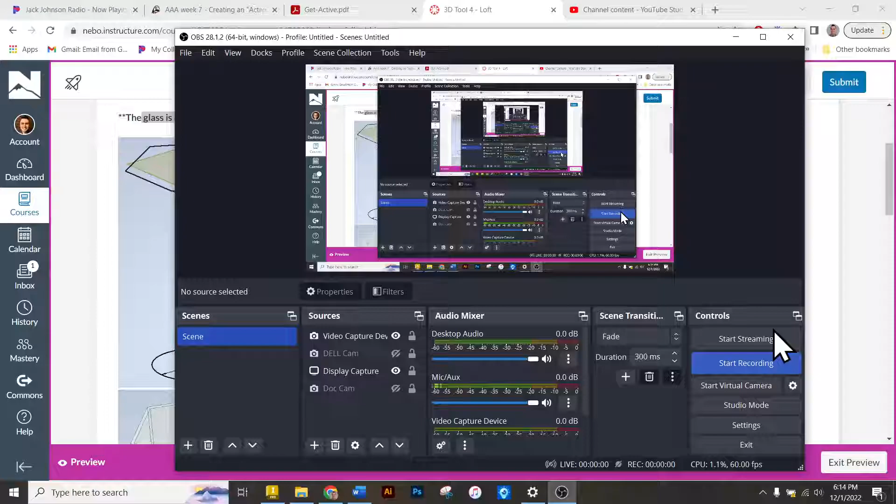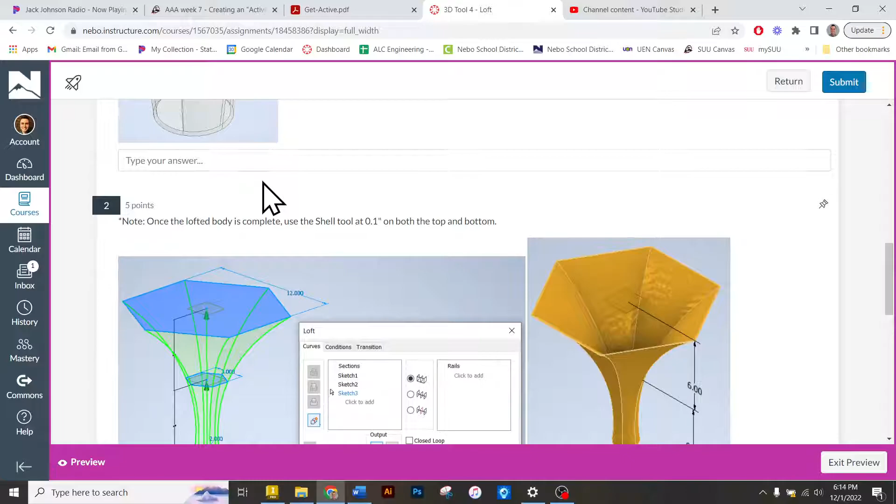Alright, so now it's time to do the Loft tool. The Loft tool is pretty awesome. What it can do is take a profile and extrude it into another profile that's different from it. So this one, to make this fancy glass, it's going to be a circle that turns into a hexagon. Some other cool ones we'll see are like the gramophone, which goes from a circle to a hexagon to a much larger hexagon, and then a fancy doorknob, that's kind of the same thing, circle to hexagon.

So let's go ahead and start with the first one, which is the fancy glass. In Inventor, I'm going to start a new file, new part, and start a sketch on the ground plane for this one so that it looks like it's standing upright like a normal glass would. I'm going to go circle, choose right in the middle there, and do 2.5, enter. Zoom out just a little bit.

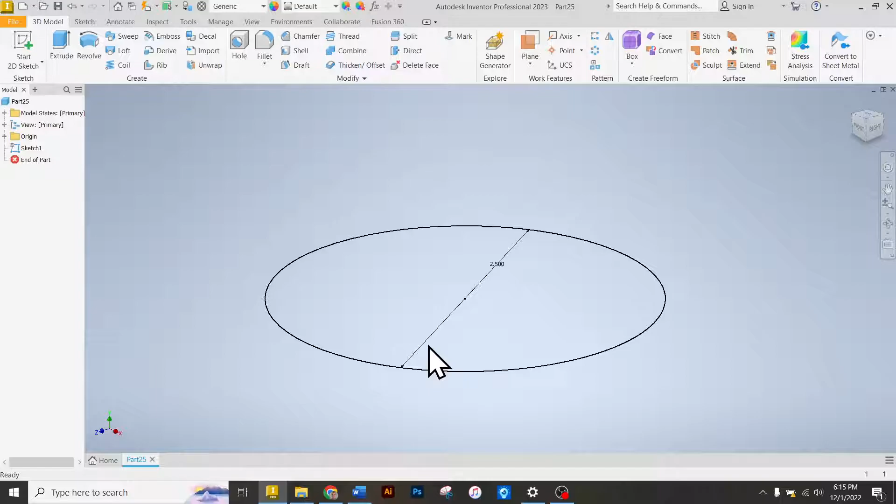Click Finish Sketch. Now I need to draw a sketch that's 6 inches above this one. Normally when we do extrusions, we just say extrude this far, but we're doing a different type of profile, so we have to create a new plane. So over here on the plane tool, we're just going to say offset from plane, that's the very first one. I'll click there, and there's nothing really for me to reference, so it won't let me click the sketch.

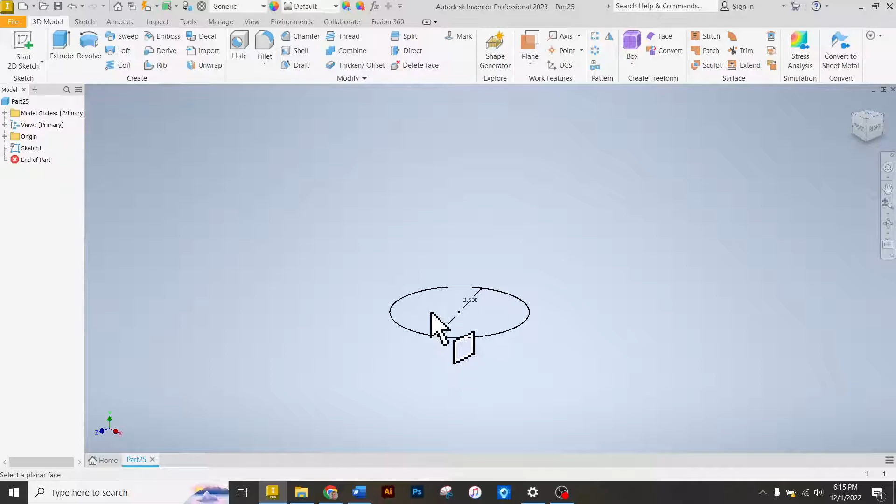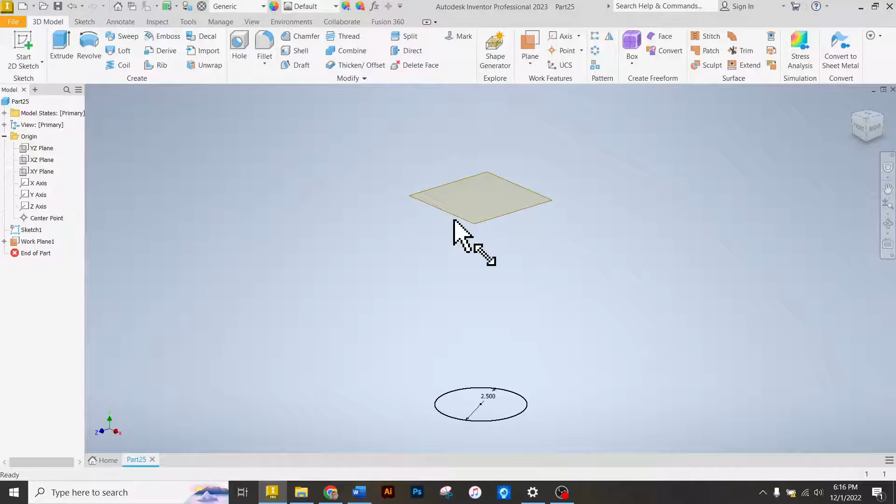So I have to go over here to where it says origin, hit the plus bar, and find my ground plane, which is the XZ. I'll click that one, and now I can raise it up 6 inches. It'll either ask me to do this manually by clicking and dragging, or I can just type in 6, enter. I zoom out, there it is. Now I can sketch on that surface. I'm going to say Start 2D Sketch, click up here, beautiful.

Now I want to make a hexagon, and the hexagon tool is a little bit hard to find. It's underneath the rectangle tool, hidden inside the polygon tool. In here I can make a polygon and define the number of edges, or sides, and this one has 6, so we're good for the hexagon.

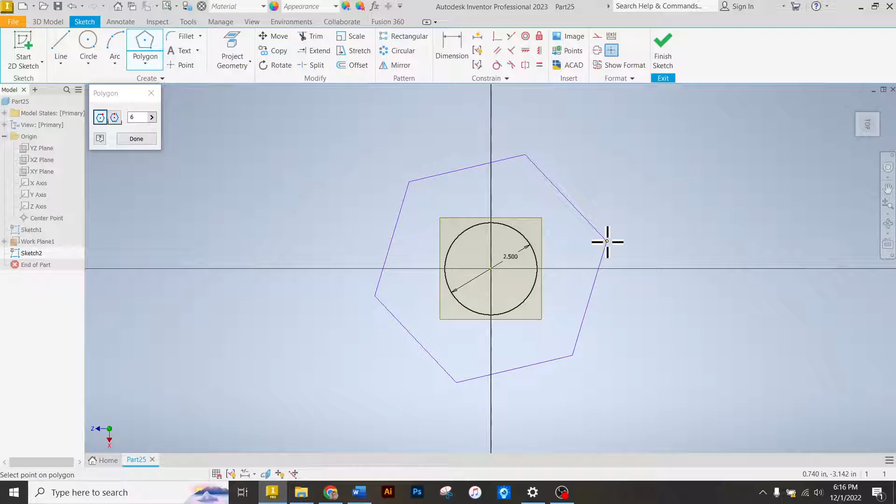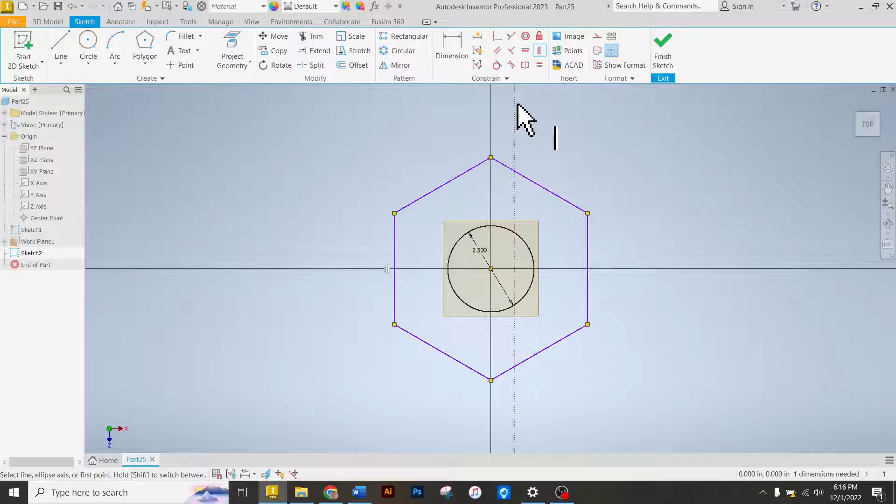So I'm going to click the center mark, and now it's just kind of floating around in space. I'm going to purposely make this a little bit off and show you how we can correct that. I'll say done, and I can use my vertical or horizontal constraint tools, either one will work, to make this line line up flat on the top. You may have to use your vertical. My orientation is backwards on this one, it's turned 90 degrees, so this is actually what up and down should look like. Anyway, as long as you've got this perpendicular, so it's either straight up or straight sideways, either way is good.

I'm going to say Dimension tool now, and go from line to line like this for the width, and it's 3.5, enter. So if I hit Finish Sketch and then look around it like this, you can see there's a profile of a circle and then a higher profile of a hexagon.

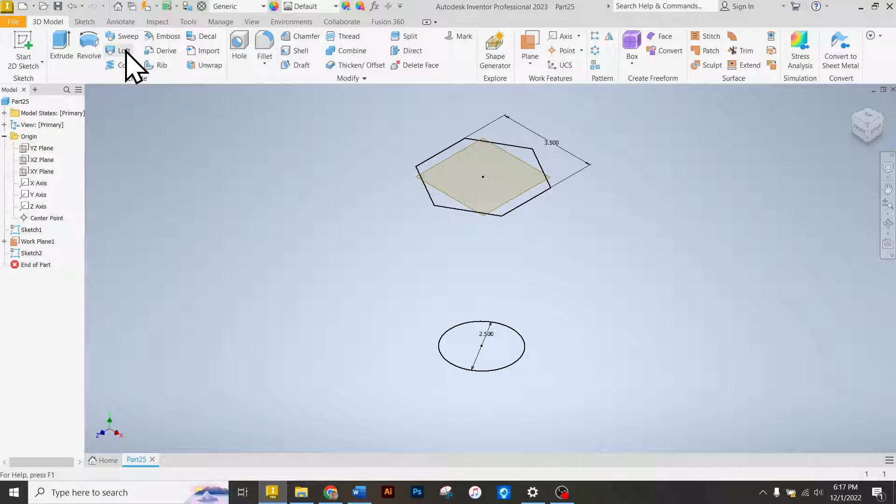So now I'm going to go over here to Loft. It's right below Sweep, so I'll say Loft, click here, and then click there, and I'm good. I click OK, and I've created a very fancy glass. Super cool. So the last part I need to do is hollow it out.

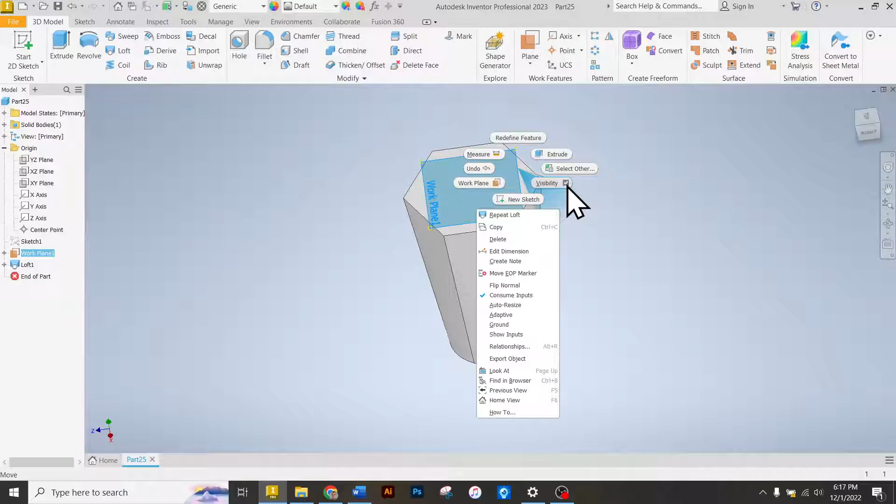So I'm going to get rid of this plane first. I'm going to right click on the edge of it and turn off the visibility, and use the shell tool to hollow it out. So shell, click the top surface, and OK. Awesome. So I made this fancy cup.

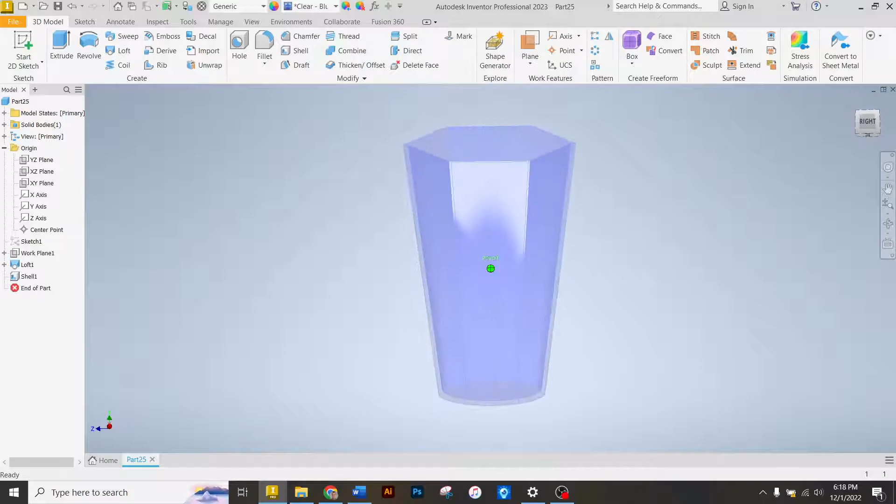I can change the appearance. Let's try glass, let's try clear blue. So it's kind of a transparent blue. Cool. I can right click on Part, Properties, Physical, and when I update, that will give me my volume, and I can enter that into the assignment down here, and I will be good to go.

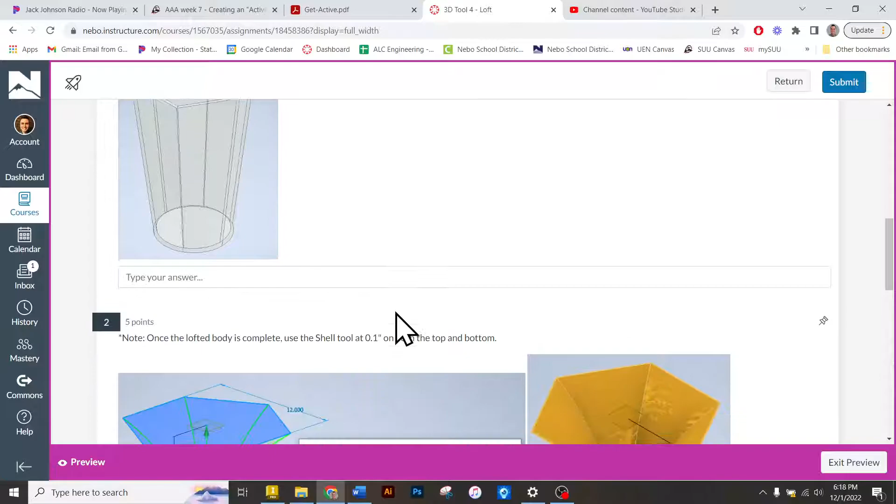Alright, so the next one I'm going to do is the gramophone. I'm going to start a new file, go back to Inventor, File, New, Part, and Start 2D Sketch. I'm going to also do this one on the ground plane first. I'll start there, and just to make this simpler, I'm going to reorient this block so that top is facing up, which is weird—don't know why Inventor does that.

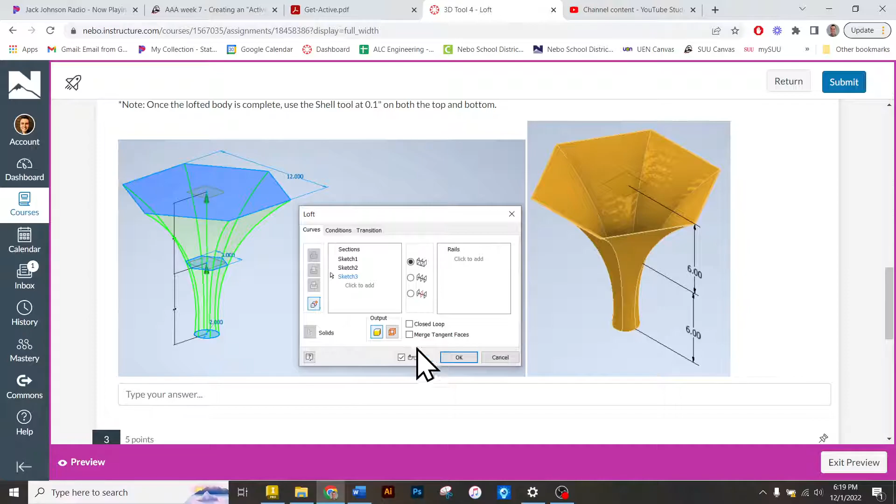And I'm going to start with a circle, and it looks like it has a 2-inch diameter. It's going to go up 6 inches to a 3-inch hexagon, and then up again to a 12-inch hexagon. So 2 inches first, right here, 2 inches, enter. Hit finish sketch. And then I'm going to do plane, offset from plane.

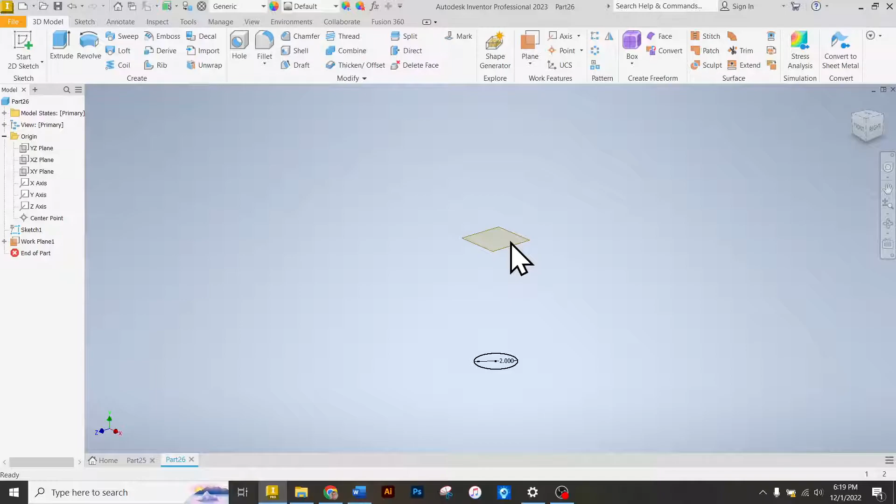And I'm going to use the origin. Click the ground plane and go up 6 inches and hit enter. And the nice thing is once I've got a plane placed in here, I can reuse that to reference another one. So I'll go make my second plane right now, or really my third one, I guess. Offset from here, another 6 inches, enter, and there we go.

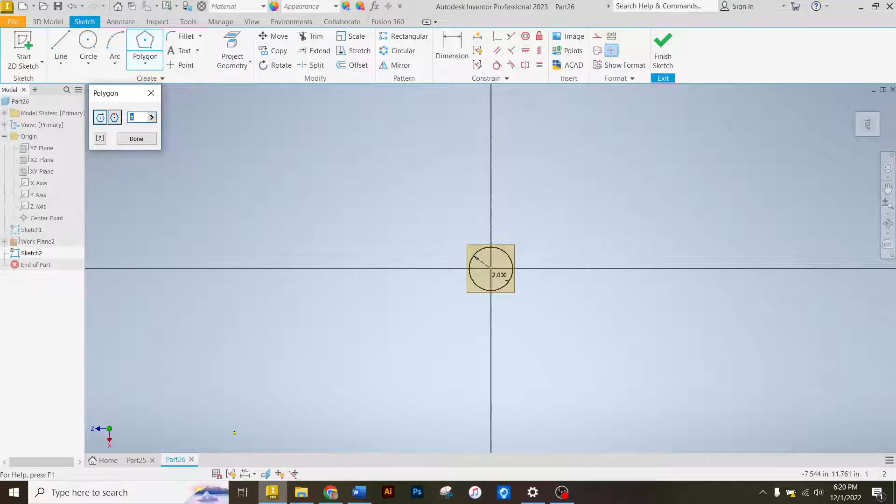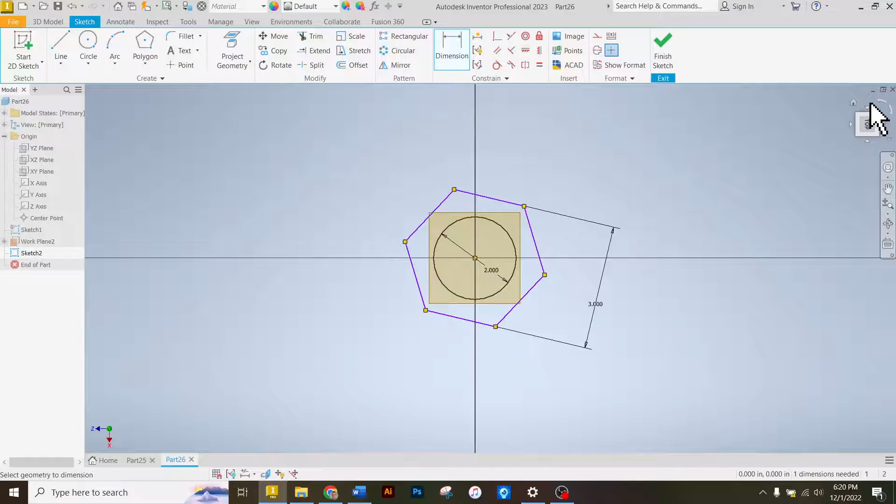Alright, so now I'm going to start a sketch on the middle one, so level 2. I'm going to put a hexagon in there. And this one has not exactly a diameter, but the width is 3, I believe. Yes, so it's 3, so I'm going to click right in the middle and just kind of drop it in here, and then redefine the edges. Make it 3. And notice it's still kind of off kilter a little bit, so I'm going to make this flat using my horizontal or vertical. And then I'll say OK.

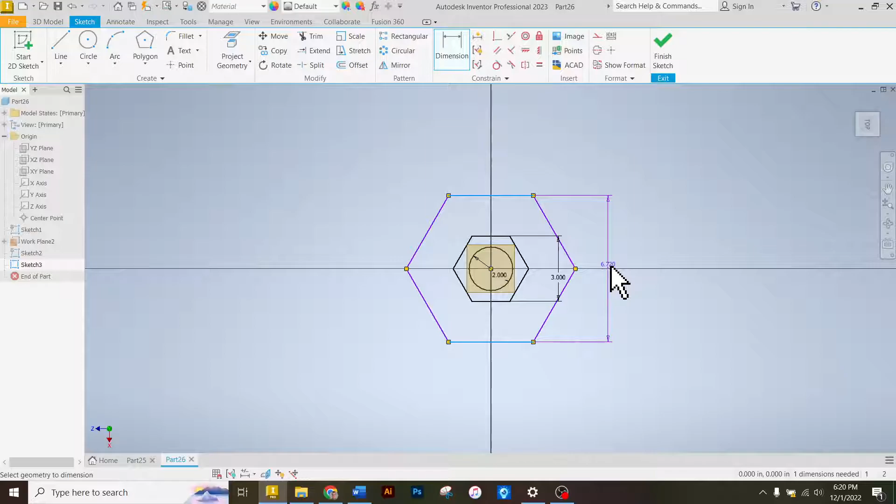Great, now I can do my top one. Start 2D sketch on the very top. And rectangle tool. Click. And I'm going to drop it in there, make this also flat, and then make it 12 inches across. Alright, sweet. So now I'm ready to use my Loft tool. Click Loft, and instead of just 2 profiles, I'm going to click all 3 for this one. So I'll start at the bottom, the next one, and then that one. And I'll click OK. I've got my basic shape figured out.

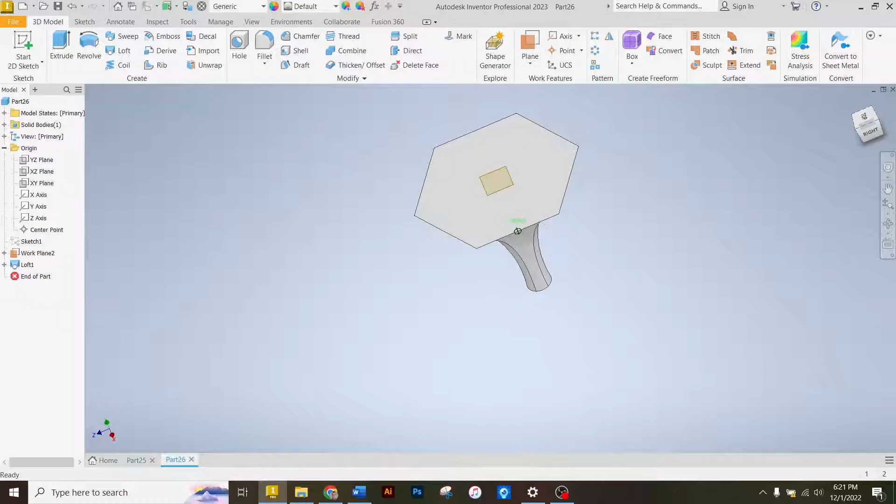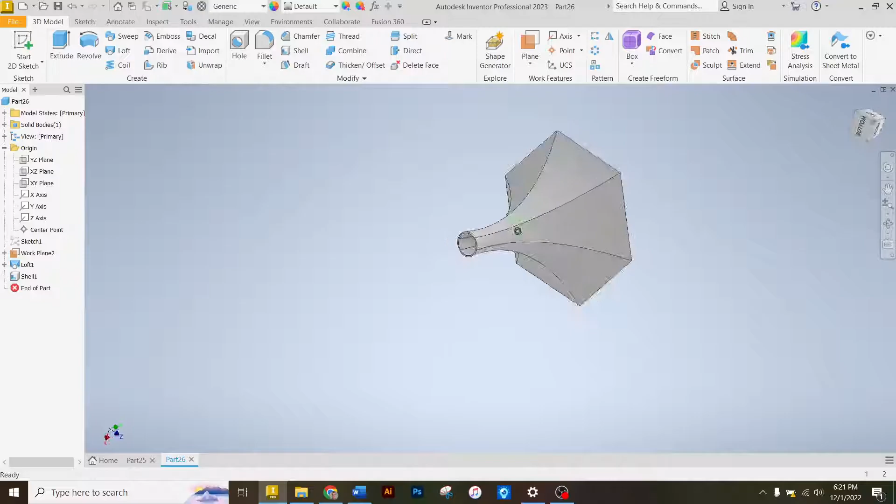Looks pretty good, right? So I need to hollow it out. I'm going to go over to Shell, click the top surface, and also the bottom one. And then I click OK. So now that makes it hollow all the way through, so I can see through to the back side. If I were to 3D print this, which would be pretty massive, I could hold that up and speak through it like a megaphone. It'd be pretty cool.

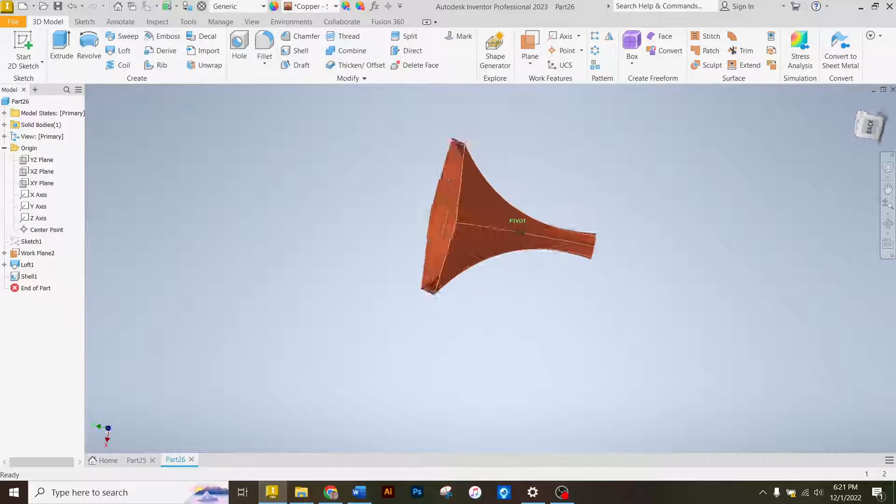Change this to, let's try copper polished, or copper satin. Yeah, those are both pretty good. Anyway, so you get the volume, turn it in, and you're done.

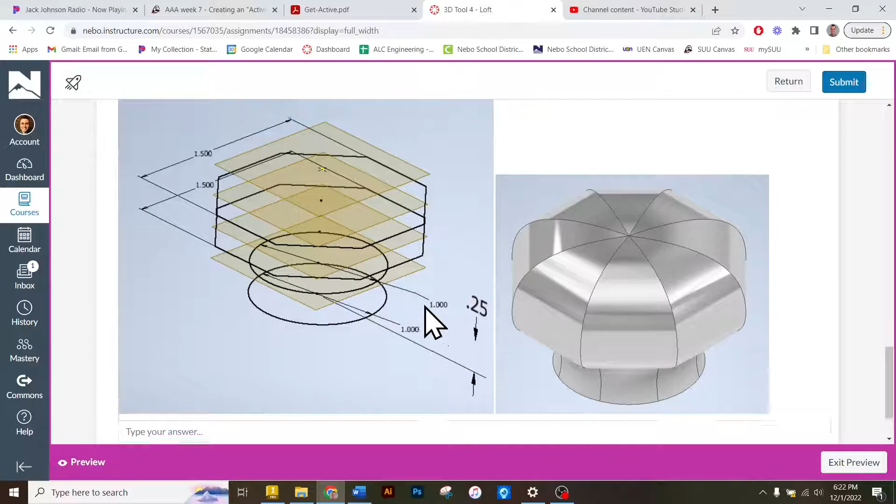Okay, so the last one is the fancy doorknob. So the fancy doorknob is a little confusing. It has 1, 2, 3, 4 planes, and well, I guess 5 if you include the original one. And it goes up, so it goes from a circle up to another circle by 1/4 of an inch, and all of these planes are 1/4 of an inch from each other. So I'm going to set this up, I'm going to draw my circle, and then set up all of these planes. So here we go.

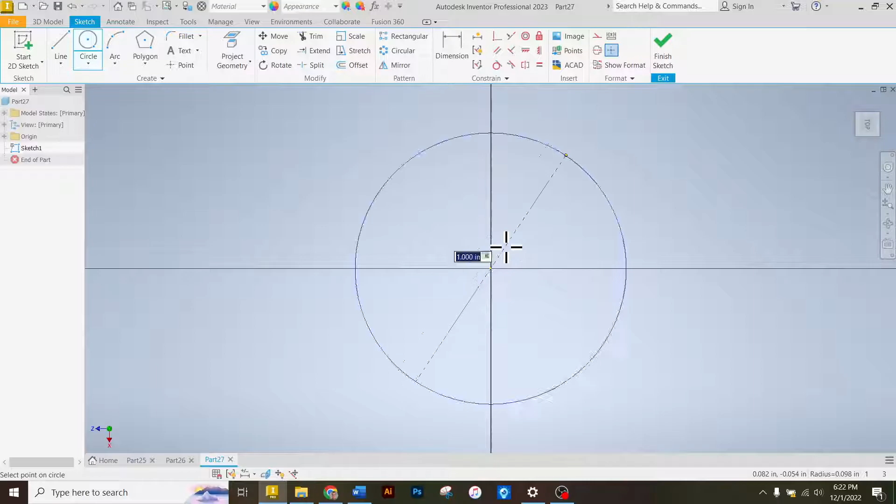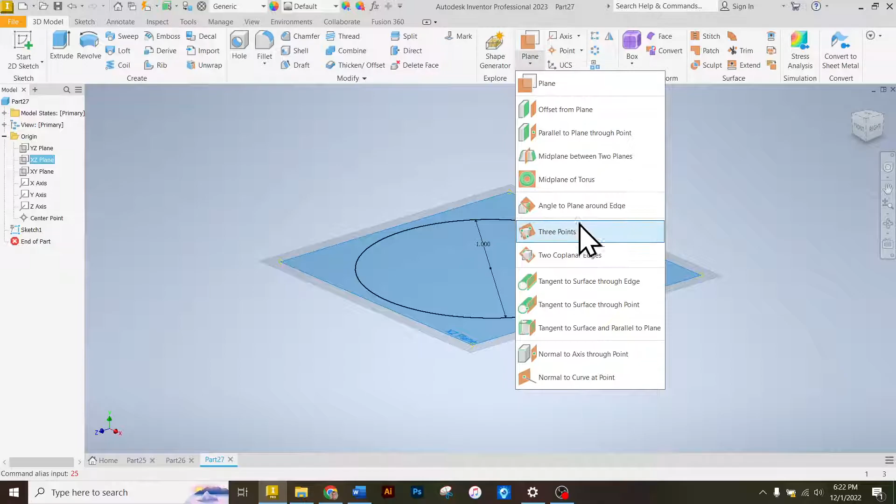File, new, start part, start sketch, ground plane, and go circle, and it's 1 inch, I believe. Yep. And finish. And I'm going to go plane, offset from plane, origin, XZ, and it comes up 0.25. It's going to let me type. Weird. Let me try that again. Offset from plane, XZ. There we go. 0.25. Enter. And I'm going to do that 3 times.

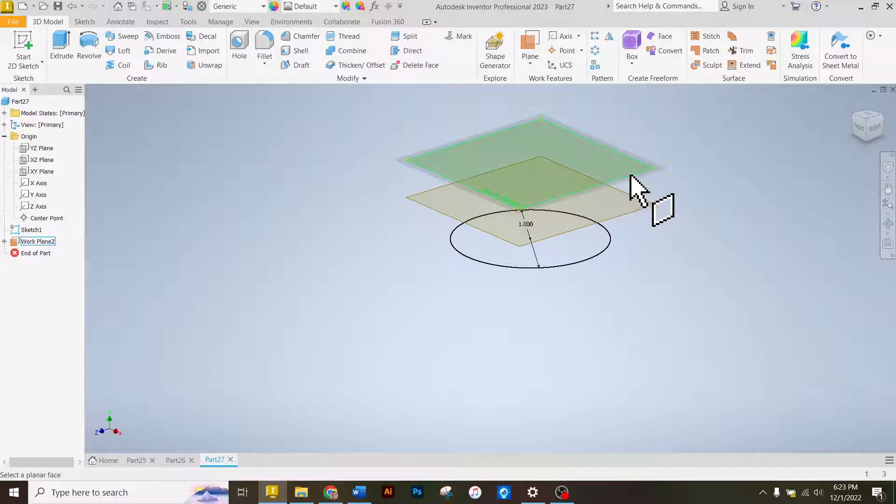So I've got the first one, offset from plane, 0.25, offset from plane, 0.25, and I think I need one more. I do. 1, 2, 3, 4. Okay. Plane, offset, 0.25, enter. Okay. So now I'm just going to work my way up this tower.

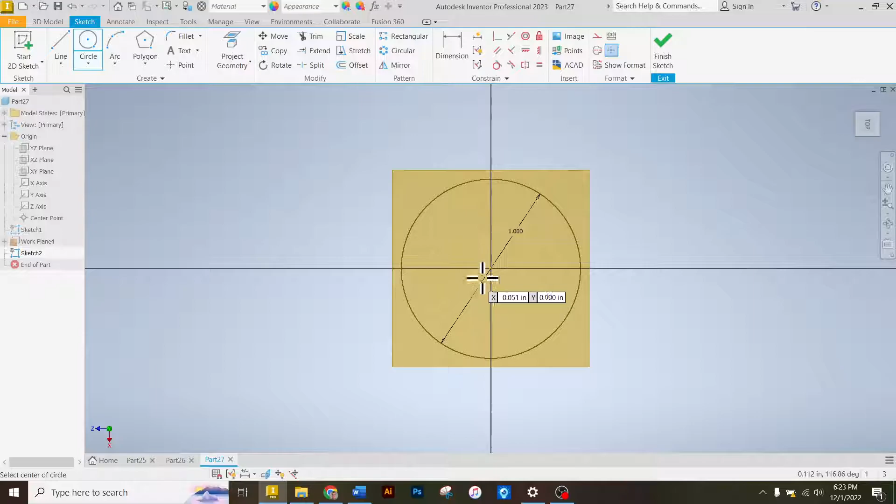So on the second floor, I guess, I'm going to go sketch and click this one. And I need another circle just like the one below it. So I'll type in 1 inch. Awesome. Cool. So I've got that circle, another circle. I'm going to start doing my hexagon. So I'm going to start a sketch on this one. And I need to make a hexagon that has a width of 1.5.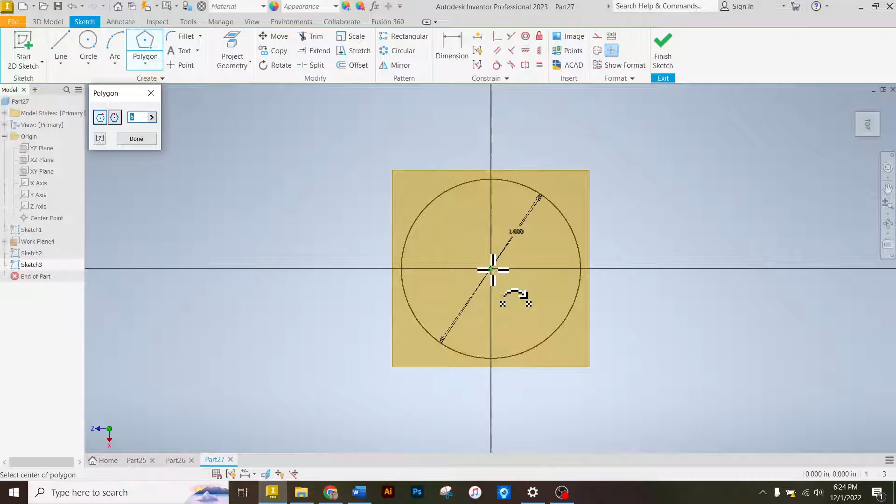So polygon, open this baby up, and I'm going to make it, oh, that looks kind of weird. I'm going to turn this sideways, like that, and make it 1.5, 1.5, enter. Cool. Click check. And then, oh, a little disoriented. Now I'm going to go one floor up, which is the same thing.

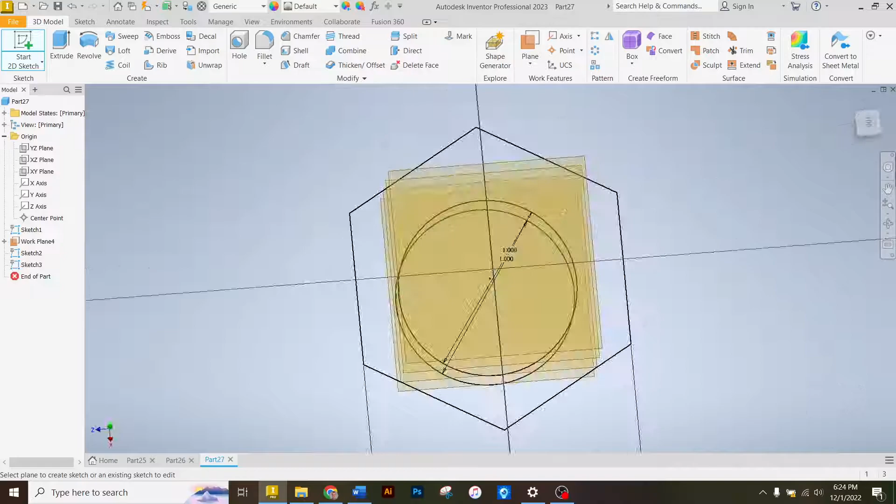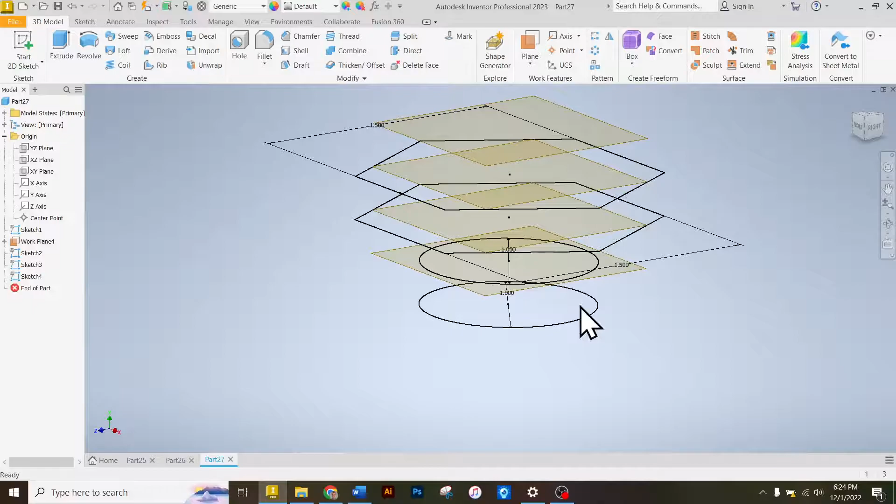Turn sideways. Polygon tool in the middle. And I'm going to make it horizontal. And then add in my 1.5 dimension. And finish. All right, so there's the first 5, I guess. 1, 2, 3, wait, 1, 2, 3, 4. And then the 5th one is actually not much of a sketch at all.

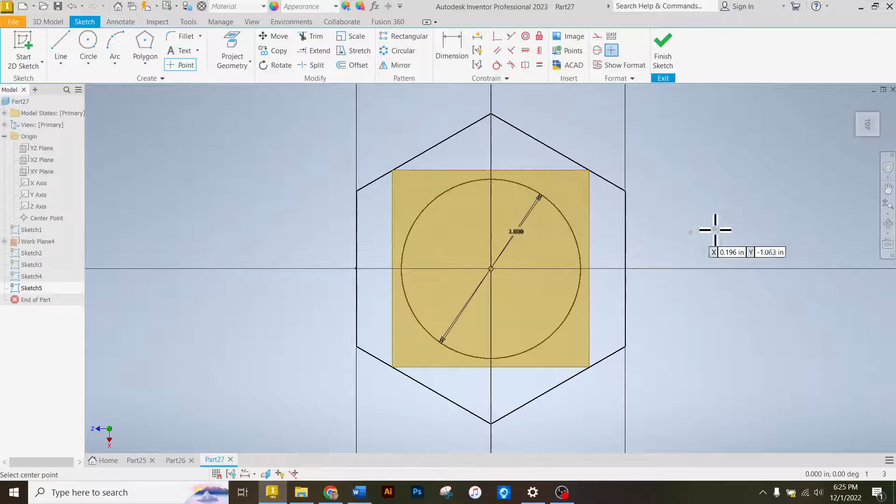The very top, we're going to make a point. So rather than drawing anything crazy, we're just going to go to this point tool right here and put it right in the middle, like that. Right click and say OK. So you can't really see it, but there's a little dot there now. So what I'm going to do is go back and finish my sketch, and that's going to be my final sketch or just the termination point.

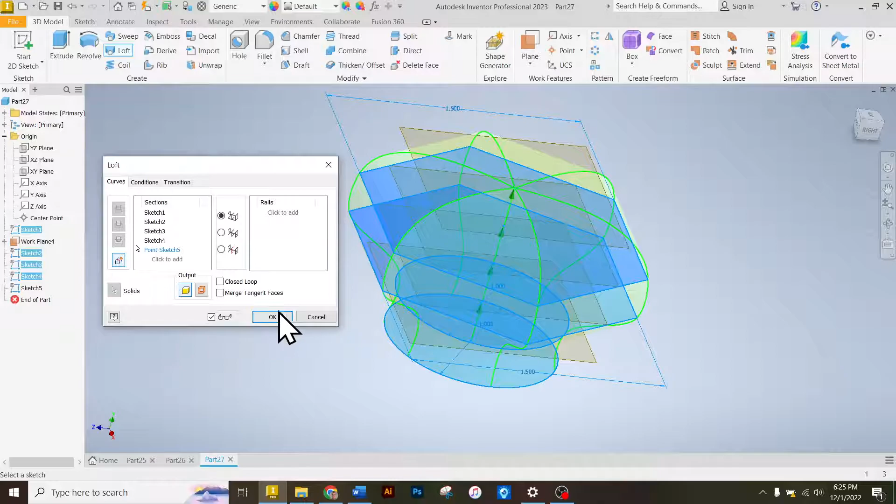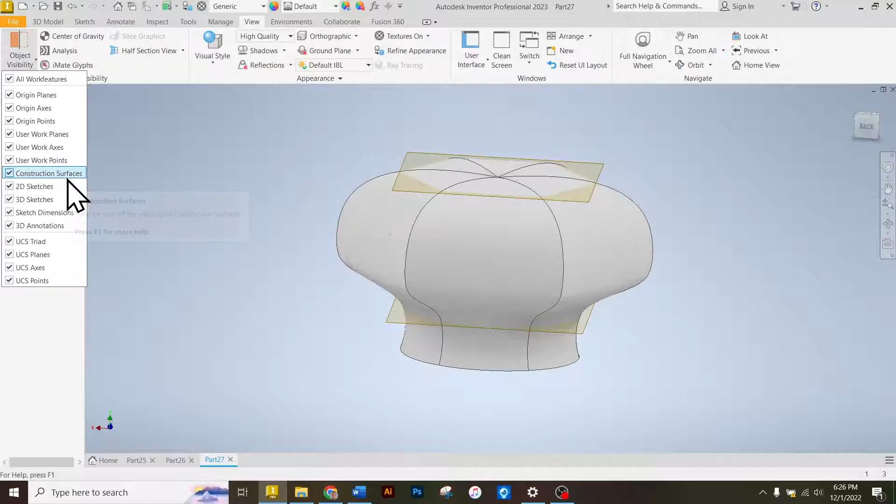So I'm going to say loft, bottom, this one, that one, that one, and then the very last one is the point. So it should close in like that when I click OK. Awesome. Looks pretty good. Except I've got this nasty set of planes that are in the way. I can get rid of those if I go over to View, drop down on Object Visibility, and get rid of user, UCS, or no, where'd it go? Work planes? There we go. User work planes. And that will just get rid of them all at the same time.

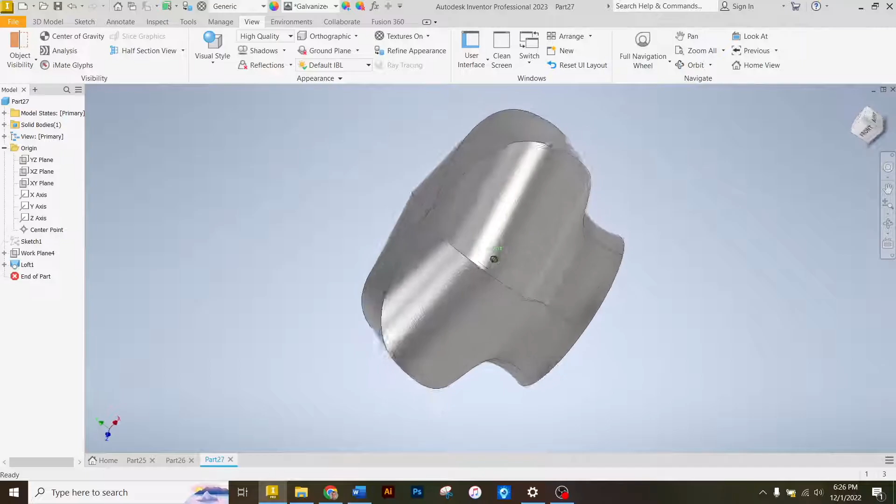Okay. I change this into whatever I want. So here's diamond plating. I guess maybe that would be cool for like a toolbox. Kind of a fancy toolbox. But yeah. Pretty cool. Anyway, get the volume, enter that, and you are done.